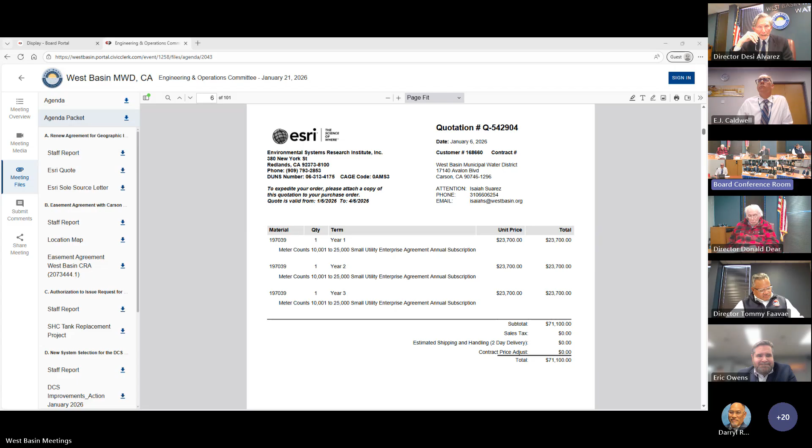In attachment B, which is on page 13 of the agenda packet, Esri has included a sole source letter, as they are the only provider of their products and related maintenance services in the U.S. commercial, state, and local government marketplace.

Essentially, if this software license is not renewed, the district program would be severely limited and restricted. It's extensively used by our operations department and used by other departments as well at the agency. So the alternatives essentially come with limited functionality, limited support and additional setup costs or integration if pursued otherwise. So the benefit to West Basin is that the renewal allows us to keep running our GIS program as such.

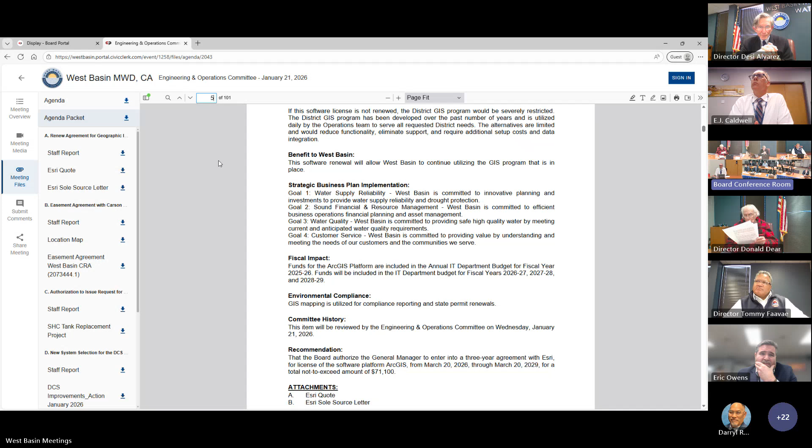The fiscal impact: essentially, the budget is being allocated from the IT department in this case through the rest of this fiscal year and the fiscal years for 2026-27, 27-28, and 28-29.

So staff recommendation: asking that the board authorize the general manager to enter into a 3-year agreement with Esri for license of the software platform ArcGIS from March 20th, 2026, through March 20th, 2029, for a total not to exceed amount of $71,100.

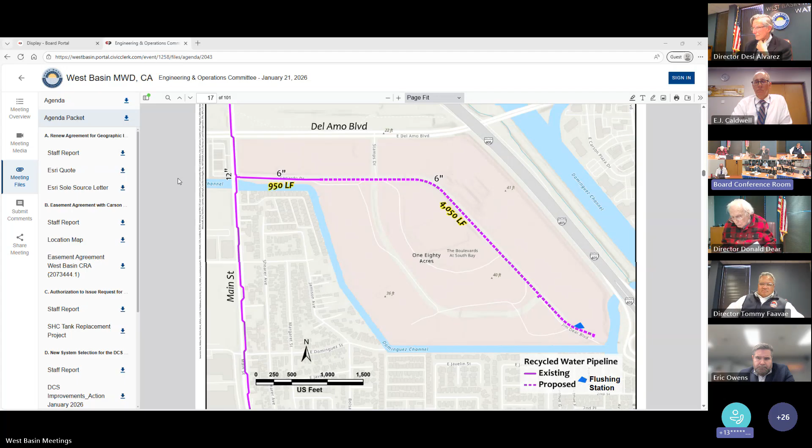A copy of the easement agreement can be found on packet page 18, also for your reference, and the dates will be updated upon approval.

Currently the project is under construction and it's anticipated that completion of the project will be in May of this year. With that, I will read the recommendation: that the board authorize the general manager to execute an easement agreement with CRA, granting West Basin access to the recycled water flushing station and related appurtenances for the district at the South Bay CRA project. With that, I'll be happy to answer any questions.

Thank you. Question, 5A, go ahead. Chair, thank you for bringing up this project because it's in my district, and I know they've been looking to build something on that 157-acre site. Hopefully this triggers some type of economic development on that site.

But I have a question. Can you explain what is the benefit for us when it comes to this easement agreement? What is the benefit out of it for West Basin? The benefit is to be able to maintain and operate the flushing station, as well as the recycled water system that will be transferred to us once completed, so we can maintain water quality and reduce any odors the system may have.

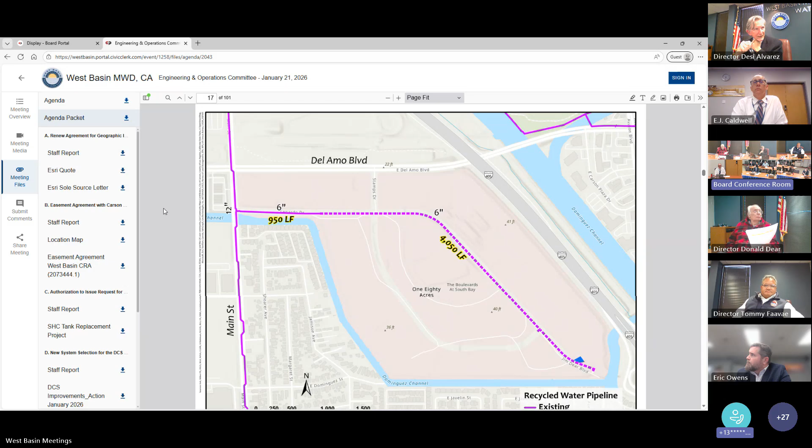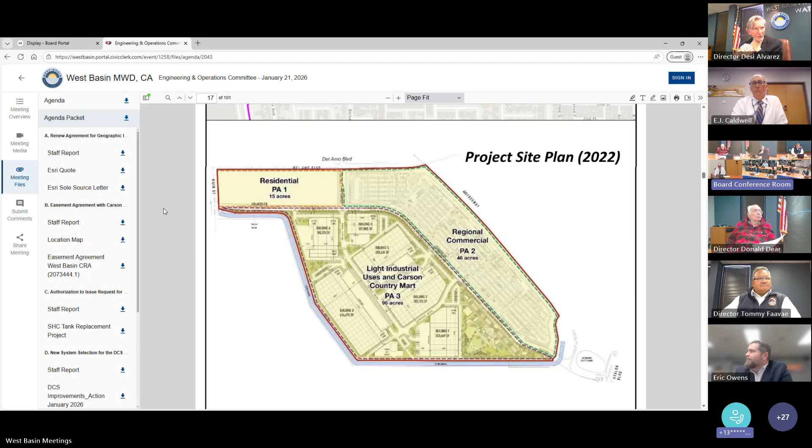Yeah, so the flushing station is in the blue area located there. That's what's going to be the... go to the bottom of the page. There you go. Yeah, so it's on the south side of the project site.

Okay, so on the easement, is that the roadway they're building there, or is it? Yes, it's like, so it's in the road. Correct, the recycled water pipeline is going to go along that road. Right, and you said the easement should be 244 square feet, part of the easement to enter and exit, but don't we have an easement for the entire pipeline?

No, only for the flushing station area. And I can actually jump in very quick on this one. So right now the pipeline area is an enclosed area in the process of being developed, and the intention is that the pipeline is going to be in what will be public right of way in the future. There is a portion of that roadway, that public right of way, that kind of curves, and the way they set up the street and the public right of way, the little portion where the flushing station is going to be located cuts into the private right of way, unfortunately. The developers and designers were trying, and we were working to try to put that flushing station within the public right of way, but unfortunately, because of the way it's curving and hugging that area, it's just not feasible.

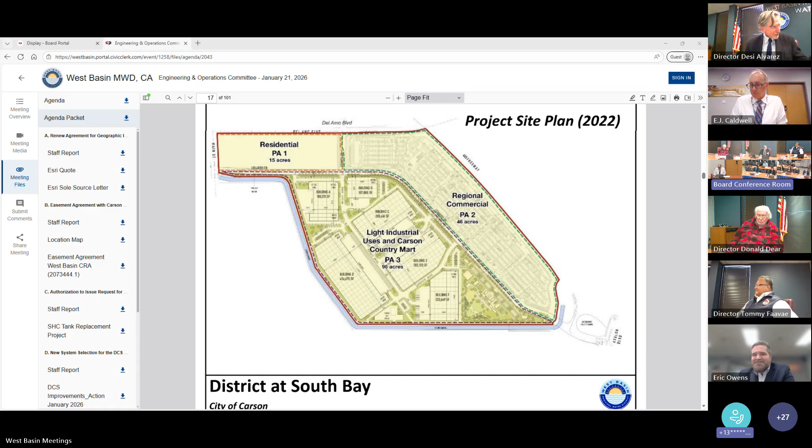I understand all of that, but the one thing I would take objection to is calling it a free asset. I'm not quite sure it's a free asset because it costs us money, and anything that costs me money is never free. I would extend that analogy to the district—if it costs you money, it's not free. Let me rephrase: free capital, costly O&M. If it costs both, we could have sold the water and not owned the pipeline. Okay, but we own the pipeline, so are we going to move this forward? We'll move this forward, yes.

What's the next item up? 5C, let me pull that one up. Item 5C: authorization to issue a request for bids for the sodium hypochlorite tank replacement at the Juanita Millender-McDonald Carson Regional Water Recycling Plant.

Mr. General Manager. Yes, Mr. Chairman, this item begins on packet page 29. And again, for this presentation, we have Alejandro. Good afternoon again, directors. This item relates to the bulk chemical storage tank improvement project at the Juanita Millender-McDonald Carson Regional Water Recycling Plant. To provide some background, sodium hypochlorite is a critical chemical for plant operations. This chemical is essential for boiler feed water production, minimizing microfiltration membrane fouling, supporting the MF and RO cleaning processes, and also providing breakpoint chlorination for the nitrification process.

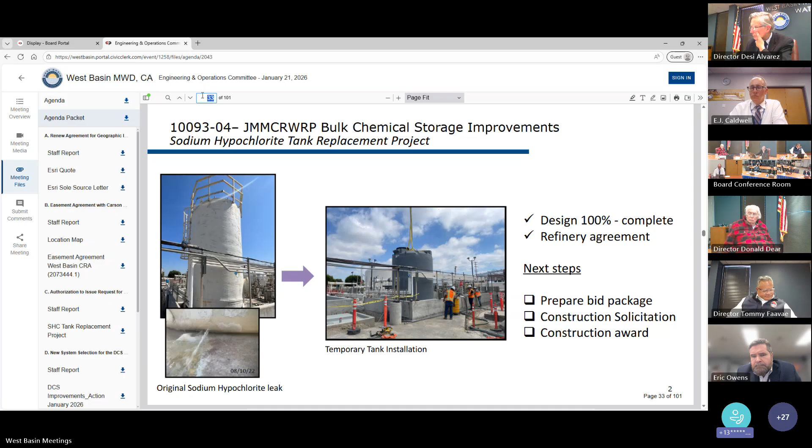So with that, I will read the recommendation: that the board authorize the general manager to issue a request for bid for construction of the sodium hypochlorite tank replacement project at JMM, the Carson Regional Water Recycling Plant, once the construction bid package is complete and ready to be issued for solicitation. With that, I'll be happy to answer any questions.

Question, Chair. Yes. You mentioned, I don't see any cost when it comes to the construction and everything. Is there a reason why there's no numbers attached? The numbers are included in the staff memo on packet page 30.

It's about $305,000 for the construction portion alone. Okay, and then so tonight's recommendation is to move the construction forward, the bid package and so forth, right? Are we coming back again for any approvals after this board? For the award? Okay.

Now, you mentioned the temporary tank and the permanent tank that's actually leaking. So was there a cost comparison when this tank is not online, compared to the temporary tank installation? What was the capacity difference, the output or input, of the smaller tank compared to the permanent tank? Was there a cost difference there?

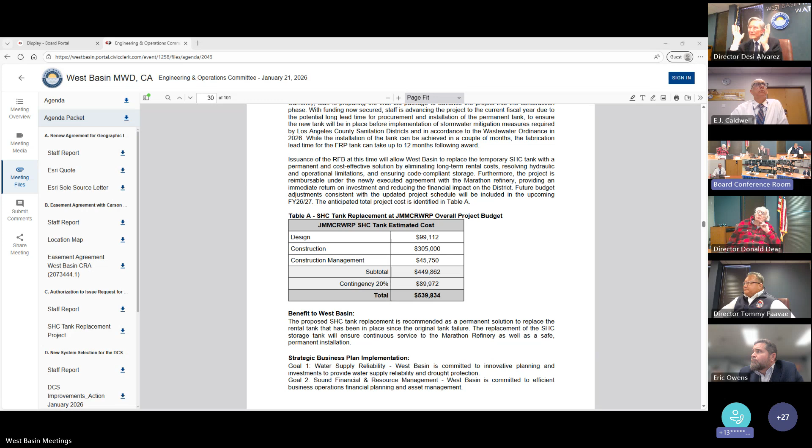How much should we pay? What's our rental cost, about 15,000 a year? 1,500 per month, so 18,000 a year. So when we have to replace this temporary tank, should it fail, there's crane rental to remove tanks, and we'll be out of service for 4 days, and we have to provide potable water. All these are calculated into the return.

So right now I'm paying 1,500 a month, 18,000 a year for the tank. I've been paying that for 3 years, so that's 54,000. And I could continue to rent this tank for the next 10 years for 180,000, which is not quite half, but about 40% of the construction cost of a new tank.

So when we did the... Okay, I'm just making comments, you don't need to respond. Just observations as somebody who's just looking at numbers.

Another number, because a lot of times we talk about percentage of construction for the soft costs. So our soft costs here are almost 50% of our construction costs. Pretty high ratio. I understand engineering costs about the same whether it's a small or large thing. Percentage wise it goes down as the construction cost gets bigger. I understand, but I had to throw that in.

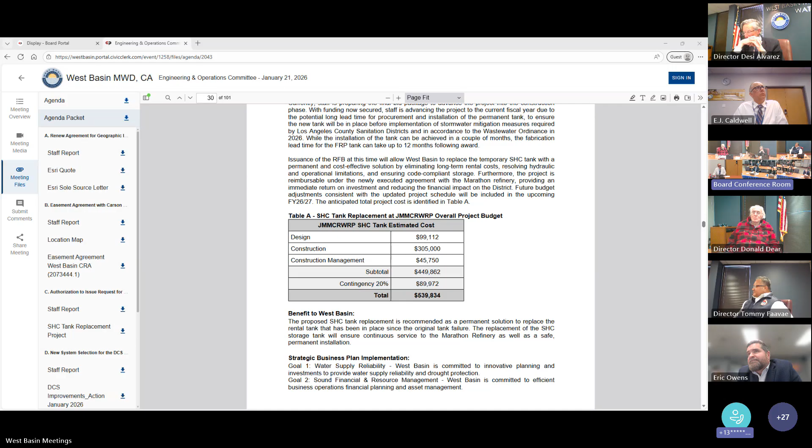All right, I'm not quite sure that we need to replace the tank, that we can continue to rent, but at some point it would have to be replaced. So I support moving this along.

And it is 100% paid for by Marathon. That's correct, Director. The reliability that the permanent tank offers is goodwill to our customer, who is paying for that reliability through that $3.1 million fixed payment. So even that aspect alone may be sufficient to put aside the worries on the dollars. Are you, Director Faavae, okay with moving it forward? Yes.

Right, so now we go to our favorite project, Item 5D, the new system selection for the DCS replacement project. Mr. General Manager, please introduce that item. Yes, Mr. Chairman, this item begins on packet page 34, and for the presentation we have John Benner, our Engineer 3.

Good evening, directors. I'm here today to present action item 5D of the DCS replacement project. Today I'll be presenting the results of our selection process and requesting input on the final system. The item begins on page 34, but we start the presentation on page 41.

So this slide gives a rough overview of the project schedule with the cost estimates. You can see that shown in the green lines, demonstrating the anticipated cost estimate narrowing as we approach that GMP.

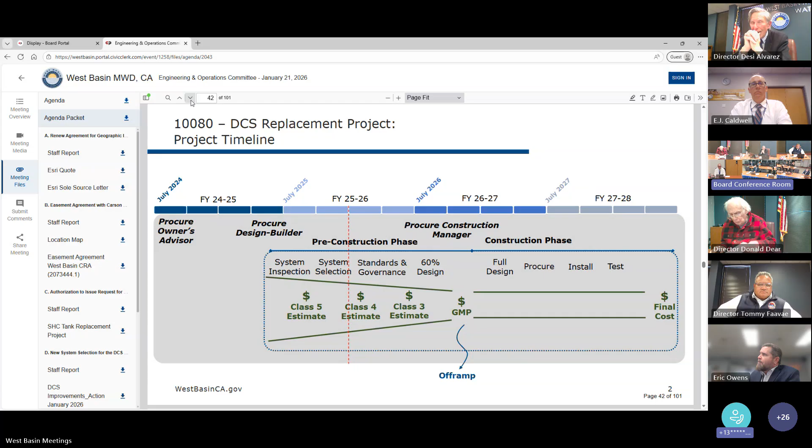So selecting this new control system is a very important thing for the district. The system we select will likely be used by the district for 10, 15, maybe 20 years. It will be interacted with daily by operators, weekly by maintenance personnel, and by engineers and contractors every time we have a capital project.

We've summarized our goal with the selection with the sentence here: to select a new control system that reduces operational risk and improves future projects while maintaining reasonable life cycle costs. And we can break these three main categories into criteria.

For operational risk, we want a system that's easy to maintain. We want it to have clear standards and guidance, and we want to have high uptime or availability of the system for reliability purposes.

And then when it comes to future projects, the new system should be easy for us to integrate into when we're bringing on an important new system. There should be good familiarity with this system in the industry so that we can bid out work, and it should be highly compatible with district equipment.

In terms of life cycle cost, we need to consider the initial installation cost of the equipment, as well as maintenance and annual support costs. And finally, the work on the system should be easily available so that we can get competitive pricing on work on the system. Next slide, please.

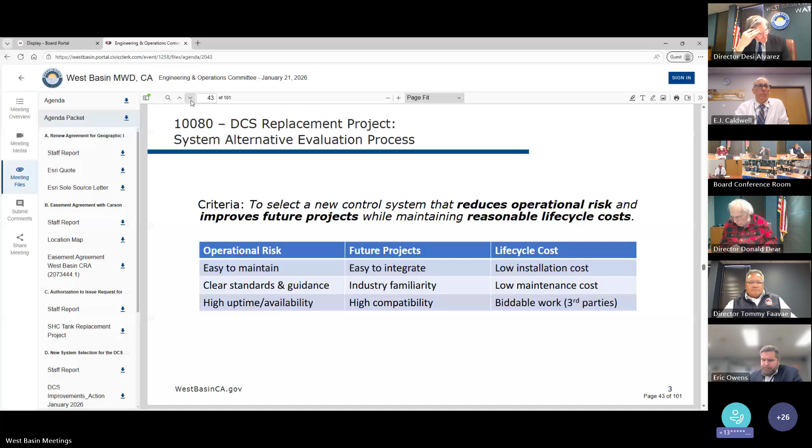So we went out and reviewed the current systems on the market. We had a two-stage evaluation process. The preliminary evaluation process looked at 13 different systems on the market and evaluated them across both technical and business needs.

I covered this preliminary evaluation process a couple of months ago, so I won't go into detail here, but it resulted in a short list of 4 systems that meet all of the technical and business needs for the district. We then took those 4 shortlisted systems and compared them to each other to try and pick an optimal system for the district.

They were evaluated across a range of categories, including a major emphasis on support costs. As these were all shortlisted systems, all 4 of these meet the basic needs of the district, but some systems are definitely more optimal than others, as I'll show in the next few slides.

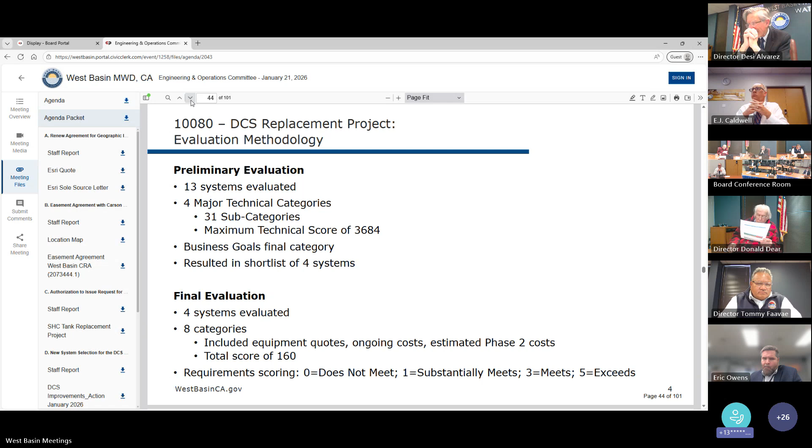This slide shows an overview of the evaluation process. So as you can see, we began with a comprehensive long list of all the major systems on the market. They were then narrowed down to that shortlist, and I'll go into detail on each of those shortlisted options, but our final evaluation process has generated a recommended system in AVEVA System Platform with Schneider Electric Modicon hardware.

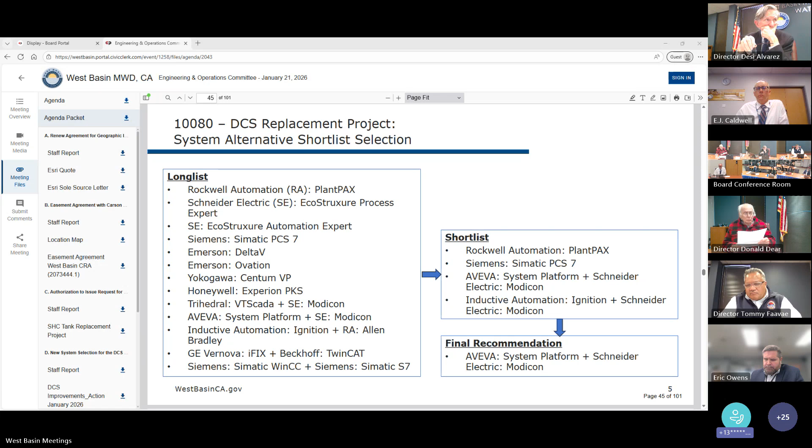Next slide. So Rockwell Automation's PlantPAX system is one of our shortlisted options. It's a single comprehensive platform with both the hardware and the software provided by Rockwell Automation. So this does mean that we'd be dealing with a single vendor for the entire system, which is a benefit.

Rockwell provides certified builds where they guarantee system performance if you build it the way that they recommend, which we would do. The hardware is made in America, and there is significant support both from the vendor and third parties in the industry, which makes bidding out work simple.

However, Rockwell has by far the most expensive hardware, which means it's also expensive to maintain, and it's the most expensive for annual vendor support as well. In addition, Rockwell's hardware is not as fully compatible with some of the older district equipment as the other shortlisted systems.

So in summary, Rockwell's PlantPAX system is a highly competent, comprehensive system, but it does have a large price tag.

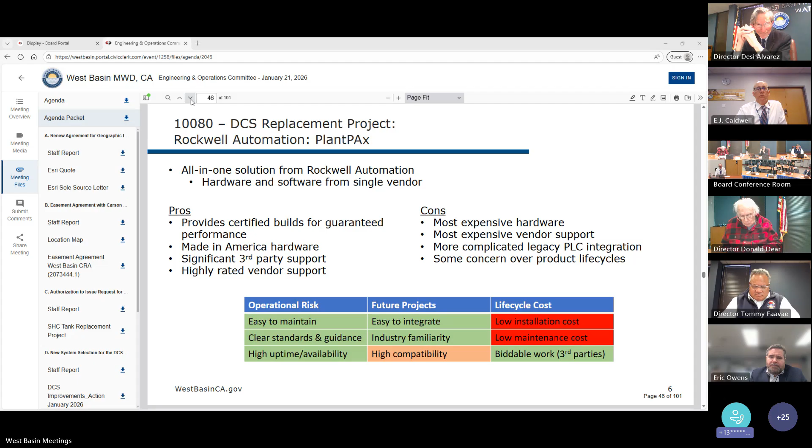Okay, Siemens. So Siemens offering is their Simatic PCS7 system. Like the previous system, this is an all-in-one solution from a single vendor, which makes support easier. Technically, this system has the most similar setup to our current DCS system, so it requires less getting used to than other options. Siemens also presents a very good plan for how to integrate into our existing system with the initial installation, connecting to our older equipment.

However, the equipment is not made in the USA, and it isn't that common in our industry in Southern California, which means there's only a couple of local consultants who will be able to bid on any system work. So we'd be limited when bidding out work to third parties. In addition, there were a few minor concerns from West Basin's IT department about compatibility with the district IT infrastructure.

When it comes to cost, Siemens is the mid-range system, both initial installation cost and future maintenance, the orange line. In short, the Siemens option is a solid system that represents the closest to a straight upgrade of our current system, but with similar disadvantages to the current system we have.

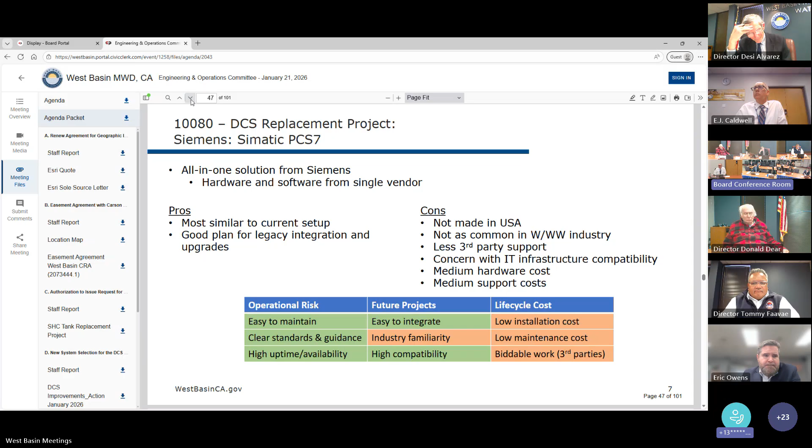The third of our four shortlisted solutions is referred to as Ignition. This solution is a hybrid option. It takes Ignition software from one vendor called Inductive Automation and installs it on top of modern hardware from Schneider Electric. So hybrid options allow us to mix and match and make a complementary system where we're covering some of the deficiencies of one aspect by getting the system from another vendor to match it.

But it does mean that when it comes to maintenance, we'd be dealing with multiple vendors if there's an issue. This hybrid system takes the very high compatibility of the Modicon hardware made by Schneider Electric, which is also the lowest cost hardware and is made in America, and combines it with the lowest cost software on the list. The Ignition software is also highly customizable, allowing us to build it however we would like.

However, the main concern comes from that customizability. The Ignition software is effectively a blank box that we're given and we can build it how we like, but it means that no two Ignition systems are the same. So we reached out to third-party contractors who told us that they would all charge more to work on Ignition systems because they would have to spend time learning how we've set up a specific system, rather than being able to jump straight into work.

In addition, Inductive Automation, the company that makes Ignition, does not provide 24-hour support, unlike the other options in the shortlist, which means the district would have to find a third-party contractor to provide the 24/7 support that the district would require. And finally, the system's bare bones nature raises some concerns with West Basin's IT department around configuration and support.

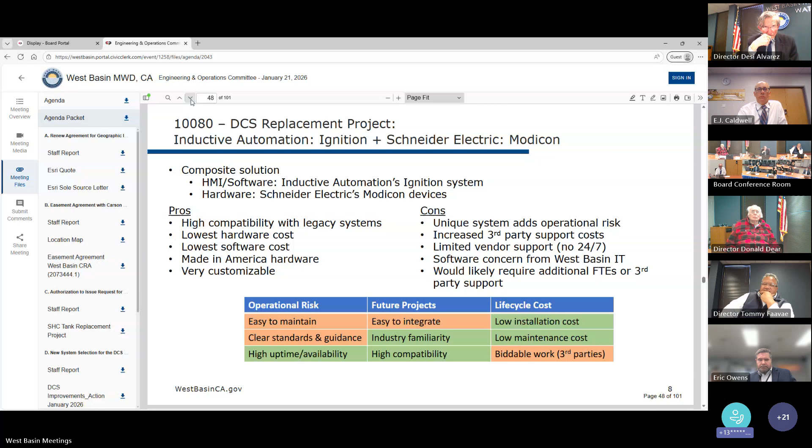Finally, we come to the last system. This is the one that came out on top of our evaluation process. This is technically another hybrid system like the last one we saw. However, the software provider, Aveva, is a subsidiary of the hardware provider, Schneider Electric. So it's a hybrid system, but it actually does maintain the benefit of a single point of contact.

This option uses the same hardware as the previous option, so the same benefits of low cost, made in America hardware that is highly compatible with all of our current and future equipment. But unlike the previous option, the software that comes with it comes ready-made for the water wastewater industry out of the box. So it means it's much easier to bid out work to third-party contractors. They know what they're getting into when they come to site and see it's an Aveva system.

In addition, Aveva, the software provider, provides the leading historian system in the industry. It's called Aveva PI, and it has a huge array of useful data analysis tools, such as the ability to track energy and chemical usage, forecast future operational costs, and visualize maintenance programs to maximize efficiency.

Final positive of the system here is that the software cost is based on number of users, not processes, unlike most other systems. So as we complete CIP projects and add pumps or treatment processes, the software cost does not increase.

However, the only major negative of this system is that it is the only one on the list that is subscription-based. This means that unlike other systems where you buy the software upfront and pay for vendor support yearly, AVEVA wraps the software cost up into their annual support plan, so you're paying an annual subscription for the initial software, keeping it updated, and vendor support.

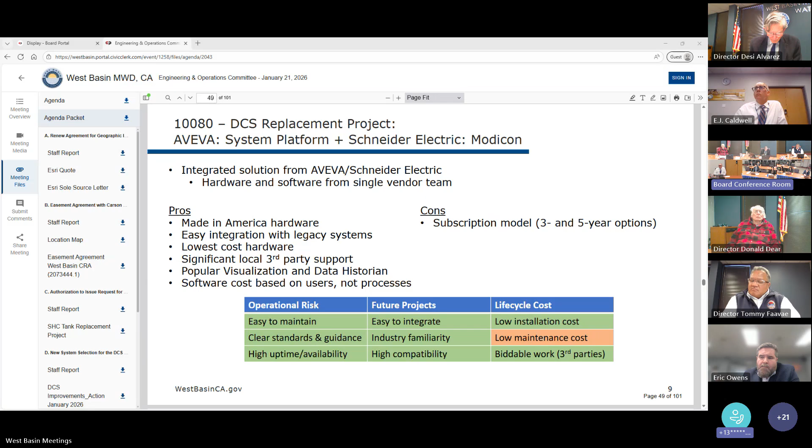So in summary, this option meets or exceeds all of the district's requirements and fits the district's needs almost perfectly, with the only concern being the risk around subscription-based software. Next slide, please.

So here you can see the estimated cost of the 4 systems. These are the costs for material and vendor support only, not the costs to install it and set everything up around it. You can see Rockwell's material costs, both now and in future phase 2 of the project, are much higher than the others. Siemens comes in at the midpoint in terms of those material costs.

However, as you can see, once the district completes phase 2 of this project, the post phase 2 annual costs in the last column here, the annual maintenance costs are actually roughly the same between the last 2 options, the AVEVA system platform and Ignition, due to that user pricing we discussed with AVEVA.

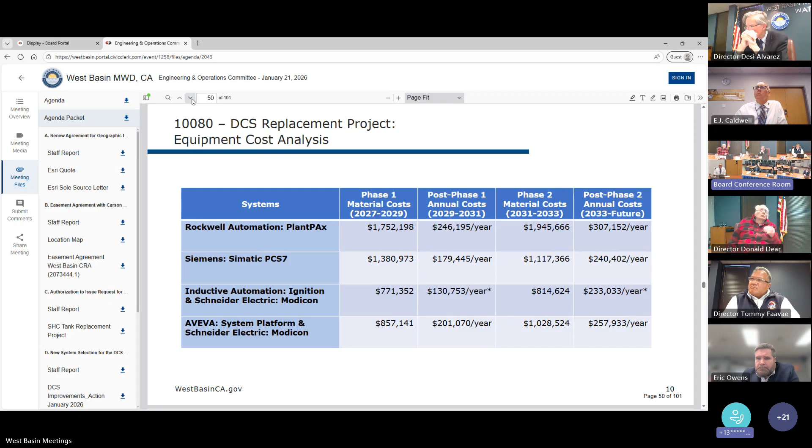The asterisks here on the Ignition annual pricing are due to those additional hidden costs for third-party maintenance of future CIP projects. We know that contractors will charge more to work on an Ignition system. It's difficult to quantify exactly how much those hidden costs will be right now, but it is a risk.

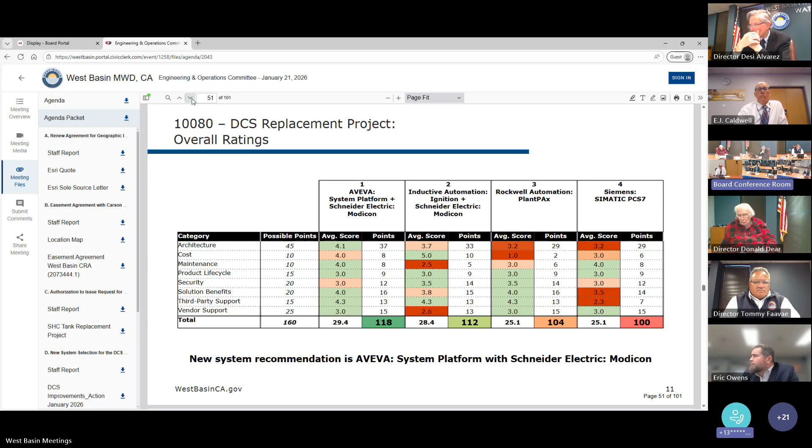And this slide shows the overall scores from that final evaluation process. As you can see, AVEVA system platform with Schneider Electric Modicon hardware came out on top and is the recommended system of the evaluation process. Next slide, please.

Here are the remaining tasks in this pre-construction phase. So we're looking today for input from the board on which systems to select. But once we've made that selection, staff will develop the array of standards shown here on the left, whilst working on the 60% system design with the design builder.

And as mentioned earlier, there will be a couple more construction phase estimates for the GMP, so we'll be able to narrow that cost down. We anticipate bringing the GMP back to the board in September of this year. Next slide, please.

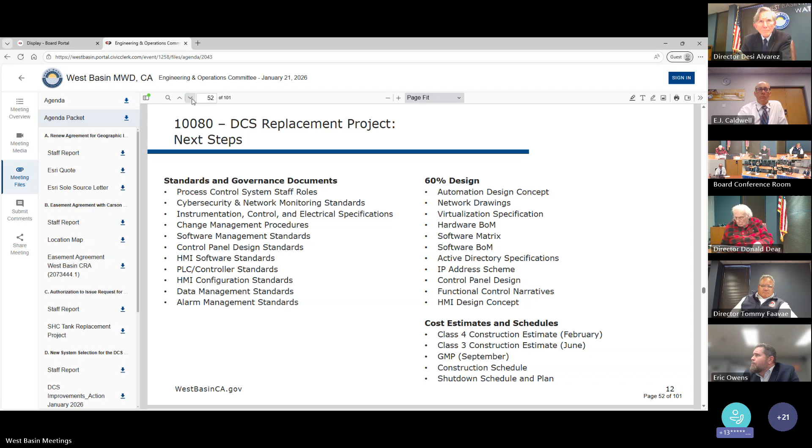In terms of budget, we anticipate remaining well within the budget for this fiscal year on this project. So far, we have invoiced only 40% of the design builder's pre-construction phase contract and 42% of the owner's advisor's contract. We anticipate finishing the fiscal year at around 80% spent.

In terms of the overall project cost, in November, staff presented the Class 5 estimate for construction services at approximately $17 million. We anticipate this dropping significantly with the Class 4 estimate due to the selection of one of the cheaper shortlisted options. We should be receiving the Class 4 estimate next month and aim to present to this committee in March. Next slide.

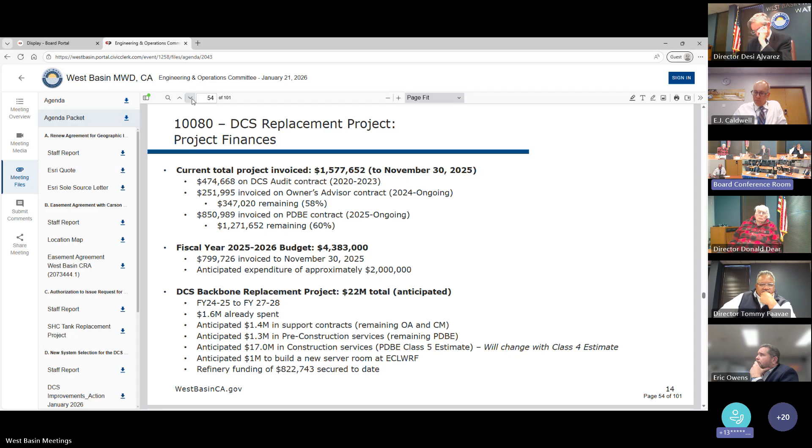So that brings me to the actual action item: that the board provide input to the general manager on which of the following shortlisted systems to proceed with. These are listed in order of recommendation. Number 1, AVEVA System Platform and Schneider Electric Modicon. Number 2, Inductive Automation Ignition and Schneider Electric Modicon. Number 3, Rockwell Automation PlantPAx. Or number 4, Siemens Simatic PCS7.

And with that, I'll conclude my presentation and open it up to any questions. Thank you for that presentation. Director Faavae, you had a question?

I thought that was a great presentation, how you broke down each vendor. You did a great job on that. Well, you made my decision clear. And the staff's recommendation, I agree with moving forward, Chair. That's my comment.

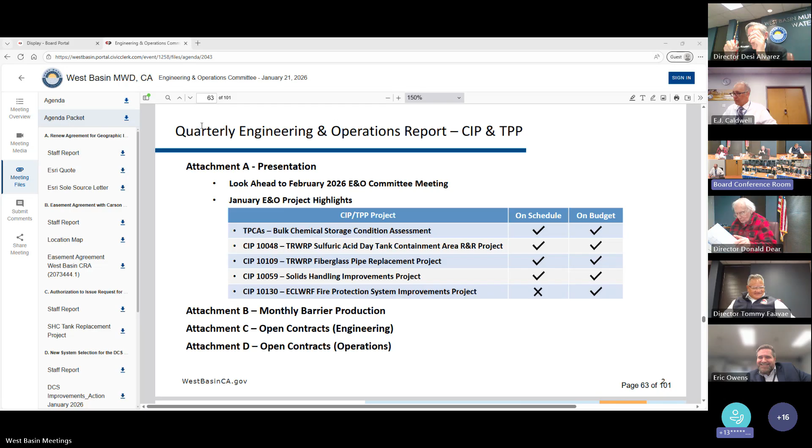Okay, now moving on to the look ahead. We have two action items for February.

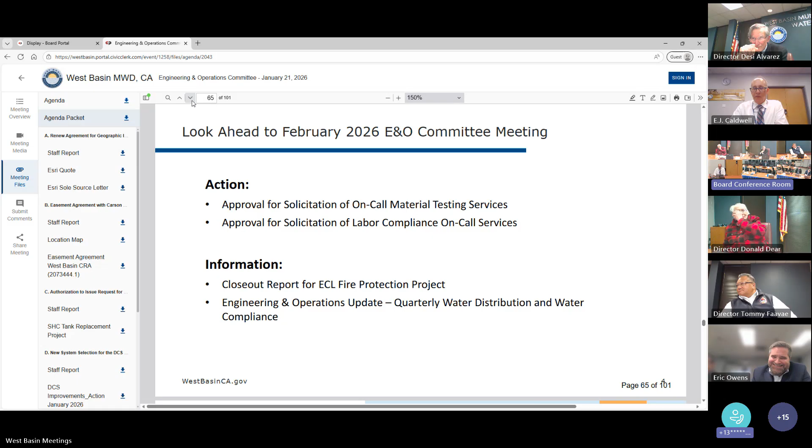Camille, to go over the bulk chemical. Thank you, Susanna. Good evening, members of the committee. As you recall, the bulk chemical storage condition assessment project was brought to you in May 2025.

MK and Associates was awarded to perform a select number of tank assessments at Edward C. Little and the Torrance Refinery facilities for phase 1 of the project. At that time, the intent was to have the ECL tanks assessed first, with the Torrance Refinery tanks to follow. However, the priority shifted to prioritize the Torrance Refinery tanks based on the progress of the agreement with Torrance Refinery. So for the past 6 months, the project has primarily focused on the Torrance Refinery tanks.

For the next 6 months, the consultant will focus on the Edward C. Little tanks. This slide shows an overview of the project status. For the Torrance Refinery condition assessment report, the 13 tank inspections occurred throughout last fall, and the final condition report was delivered to us in December.

While I'm the project manager for the Torrance Refinery water recycling plant tanks, Alejandra is the project manager for the Edward C. Little tanks, so she will give you an update on those.

Thank you, Camille. As Camille mentioned, the condition assessment at Torrance took place first. However, there were some activities related to the Edward C. Little tank that occurred in a parallel effort with the assessment conducted at Torrance. These activities include the kickoff meeting to discuss and coordinate the priority for each of the facilities, a site walk conducted in late summer, and the development of the work plan.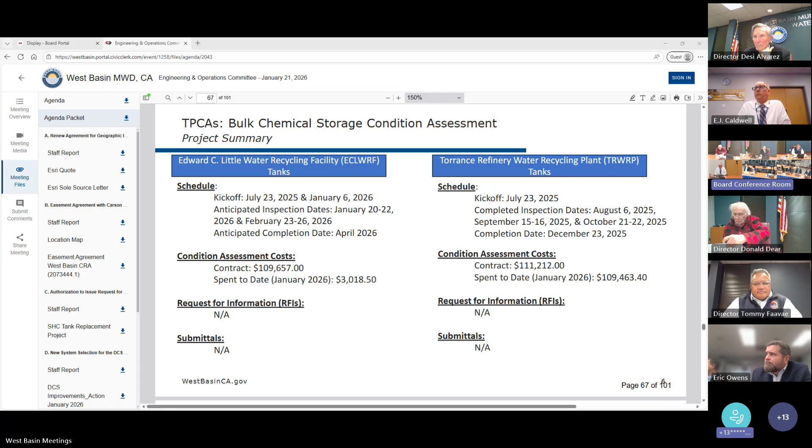Next slide, please. At Edward C. Little, there are 11 tanks that will be inspected. 2 of those 11 tanks are for sodium hypochlorite, and the remaining are ferric chloride tanks. The image on the right side of the slide illustrates the location of the tanks, at the back of the treatment facility near the top floor.

For the inspections, the first round, which is already ongoing, is inspecting 6 tanks: 1 of the sodium hypochlorite tanks and 5 ferric chloride. For the second round, it will assess the remaining 5 tanks. Once the project is completed at Edward C. Little, staff will share the results of the assessment with the board. With that, I will hand it over to Camille, who will be sharing the results of the assessment at Torrance.

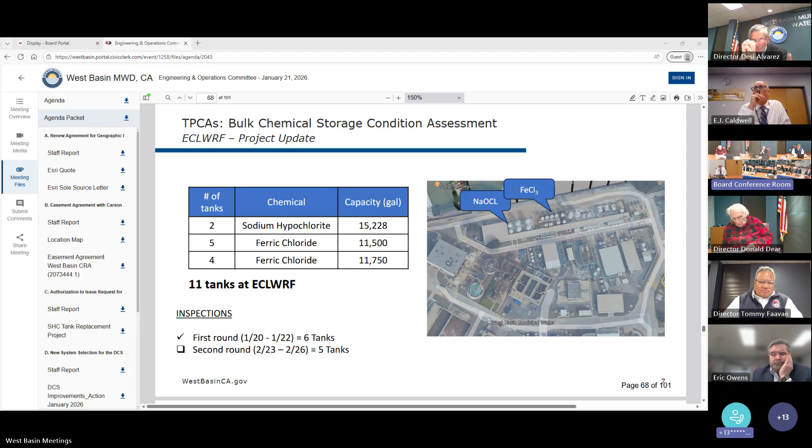Alejandra, on the next slide, you will see a map of the 13 tanks that were assessed for Torrance. I want to note they range between 250 gallons to 8,000 gallons. There are 5 bulk chemical storage tanks located on the south side of the facility, with the rest spread out around the north side of the facility.

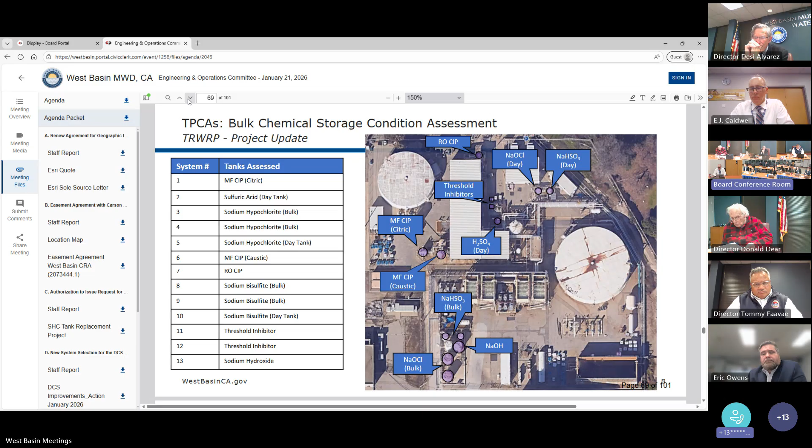On the next slide, you will see a table. MKA's inspector, Pacific Engineering, performed 3 rounds of inspections to look at all 13 tanks. The inspections included visual inspection of the exterior as well as the interior tank where it was accessible. Acoustic sounding and Barcol hardness testing was performed to detect voids, delamination, and surface hardness. Visual inspection of the chemical feed system assets was also performed.

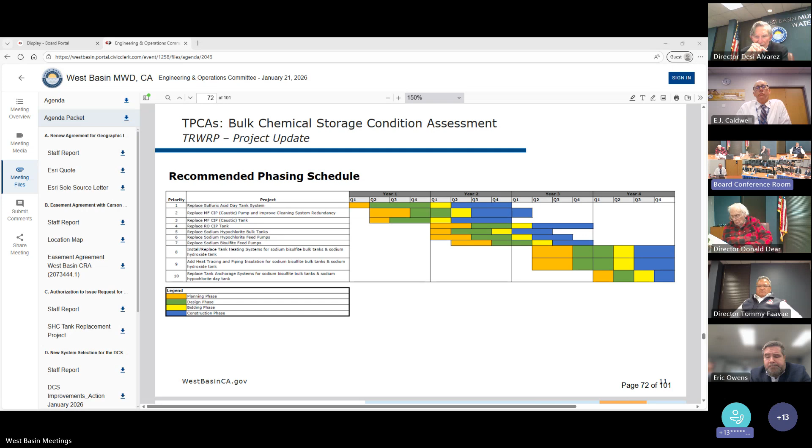So what kind of recommendations have you seen so far? It's focused primarily on tank replacements, but because MKA also looked at the associated assets, they bundled some of these projects with replacements of things like the level indicator. Based on what they visually inspected, we were able to get these bigger, more CIP focused projects for rehab. Okay, so go to slide 11 or 10, whichever one preceded this one.

So on that tank, is the recommendation going to be that it should be replaced? Correct. So that specific tank is priority 3. I'll replace the MF CIP caustic tank. And the reason for that is? The inspection they did. So they did Barcol hardness testing, and they determined that the remaining useful life is lower, and also the fact that where it's located within the process treatment.

When you say remaining useful life is lower, compared to what? 10+ years. That's the industry standard for it to have a good enough life to just continue. Once it goes below 10 years, that's when they start recommending. Maybe you could speak to the previous slide, that has the respective lives in different categories.

It's a little tiny though. Right, so this table shows that the caustic tank, it's a little small, it's less than 5 years. So when it starts going less than 5 years, that's when they start to recommend that it should be either rehabilitated. But that's just kind of an industry standard.

An industry standard says you should replace water pipelines every 70 years. There's pipelines that have been in the ground for 100 years and are perfectly good and don't need replacement. So when we're looking at comparison to that, that's what I'm saying. Why just do an industry standard when that's just meant to give a guideline? Maybe you should look at it in a time period, but that doesn't mean it needs replacement in that time period. Some facilities last a lot longer, some last a lot less. There are pipelines that fail in less than 70 years for other reasons than anticipated by the standard industry use. And like you said, there's some that are over 100 years old and don't need replacement today. So the whole point of having those standards is just a reference.

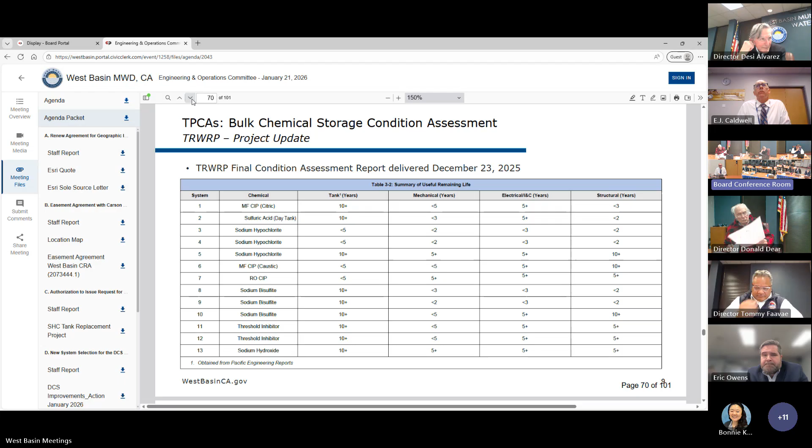Appreciate that. So let's go back to the slide with the pictures. Slide 10. All right, so if we're looking at that anchor bolt, it looks pretty ugly. Probably why we chose that picture. So it's always meant to impress. So if I scrape that, clean it up, and get all that rust removed so it doesn't look ugly, how much metal have I really lost?

I would suggest that the anchor bolt is fully representative of other materials in that location. One thing about our comparison to industry standards is we are very coastal, most of our facilities, right, Southern California. So specifically our metals probably take a little heavier beating than they would in more inland communities.

Additionally, all of these facilities were built through a design build approach back in the 90s and early 2000s. And I would offer that traditional design build has historically been used to get the project done speedily and cheaply. So what that could suggest is our facilities were not built for the longest life cycle possible. We have a lot of strikes against us as far as the need to repair and replace a lot of these assets. But yes, to your point, Director, we could probably salvage that one anchor bolt right there.

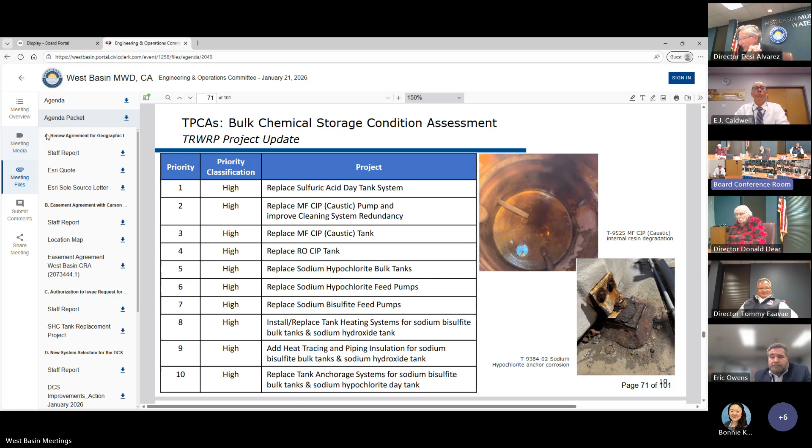The other presentation is the solids handling improvements project. Good afternoon, directors. I'll be providing a brief update on this project. You can follow me on page 81 of the agenda packet. Next slide, please. Which page did you say? 81.

One recent change, we have made the determination that a truck scale is no longer needed. We ran into some constructability issues, which made us reevaluate the need for a truck scale. And after a thorough internal investigation and discussions with our compliance department, we've determined that a truck scale is no longer needed, so we'll be negotiating a credit back to the district through some value engineering there.

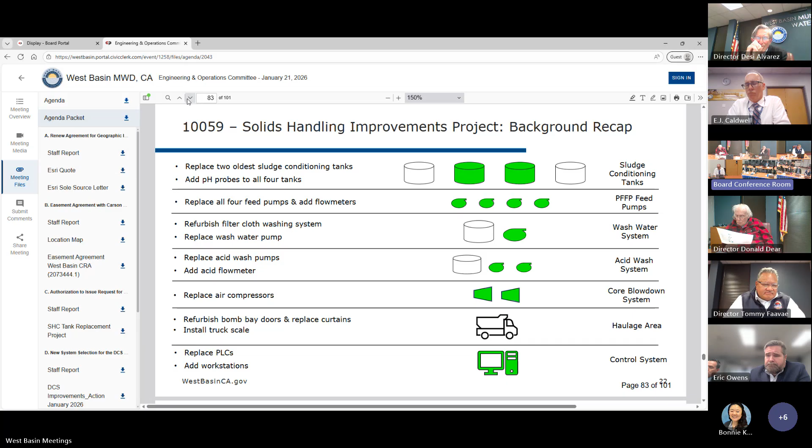In terms of the control system, we'll be replacing the PLCs and adding workstations as well. Next slide, please.

Here are some updates for construction photos. On the left-hand side, you'll see our temporary dewatering system that was brought online in November. This has allowed us to take down the plate and frame filter presses and proceed with the bulk of the project. The middle slide shows some of the dewatered solids. And the final photo on the right-hand side is the view from the second floor of the sludge handling building, looking down on the mixing tank and some of the polymer systems.

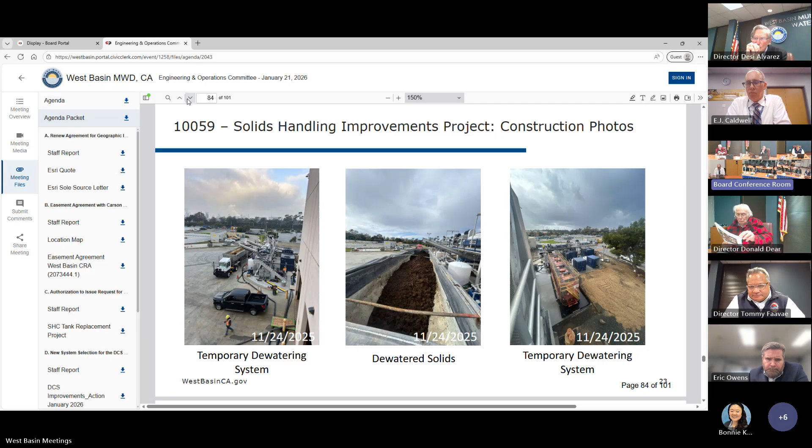The photo on the left-hand side represents the new tank foundations. We are expecting our new sludge conditioning tanks to show up hopefully at the end of next month, but until then, the tank foundations sit there ready to receive them.

At the beginning of December, we began pressure washing the plate and frame presses in anticipation of removing the plates to send them off to be recoated. That was scheduled to be the critical path of the project, recoating our 280 filter press plates, expected to take 4 to 6 months. The factory has had a very quick turnaround. We're sending off the last batch of plates to them next week, and also expect to receive the first batch back, so we're ahead of schedule there.

The final photo on the right-hand side shows the demolition of the feed pumps and their respective foundations. We'll be building new equipment pads for those pumps and expect to receive those this summer.

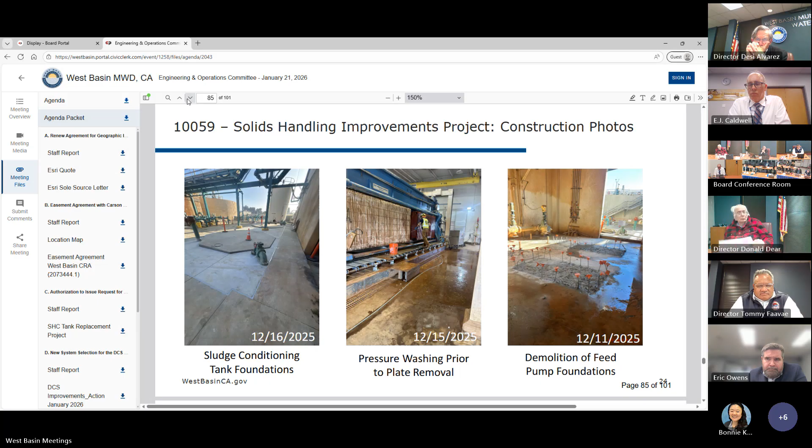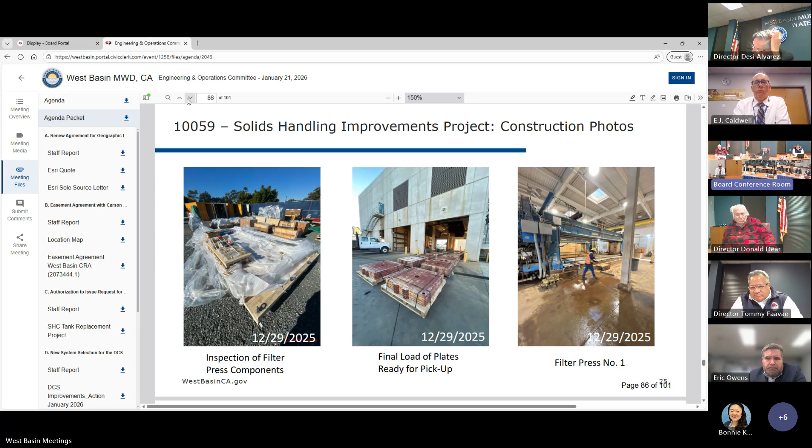Next slide, please. The photo on the left-hand side represents unboxing and inspection of a large shipment of our filter press components. Those were delivered as part of an owner-furnished PO through Universal Filtration. We received about $700,000 in equipment from Germany, who is the original manufacturer of the filter presses. The middle photo represents our plates ready for shipment, being recoated in a factory in Michigan. The photo on the right-hand side shows filter press one empty of those plates. Next slide, please.

Finally, a quick overview of where we stand with our open POs. We have 5 POs for this project. PACE is providing our temporary dewatering system, those are the centrifuges shown in the photos. Universal Filtration is providing a significant amount of replacement filter press components, and helped us deliver those components from Germany in December. Blue Angel provided circuit breakers for the temporary dewatering system as well. Arnaz is providing our 2 sludge conditioning tanks, and Advanced Systems Co. is providing an odor control system. With that concludes my update. I'd be happy to take any questions.

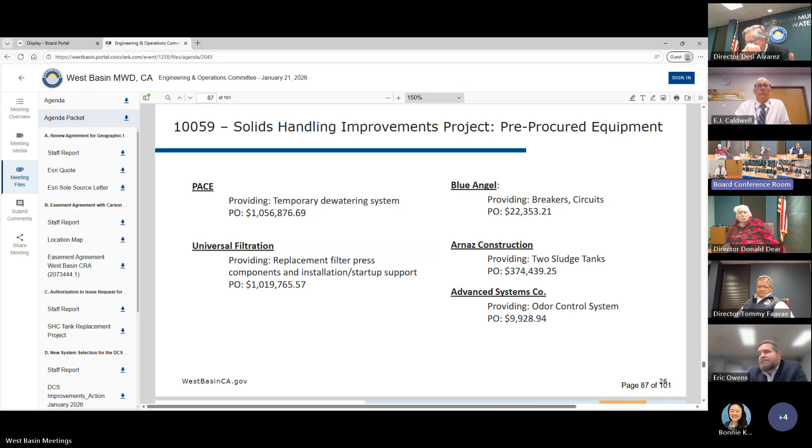Okay, so that clarifies that. I was just trying to say, I think in Kevin's slide where he had different consultants or contractors shown with the dollar values, there's a couple of different pre-procurements. Blue Angel, he mentioned, Arnaz, those are equipment that we purchased directly in order to get them early and get them manufactured while we continue to develop the request for bids and selection of the contractor. Okay, thank you for that clarification.